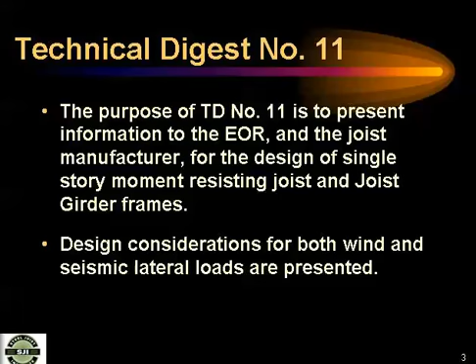It was just, you knew what the loads were. Now, when I look at these examples, half the time is spent figuring out ASCE 7 and figuring out what the load is. It's much different than where I'm from in Wisconsin, where it was a 20 PSF wind load, and take 3/4 on the roof. Most of my buildings have flown away by now, by the way, so it's a different world. But there's a lot of time spent, and it's not easy. It's complicated, so it takes time.

But that's the purpose. It's limited to single stories, not because of wind requirements, but primarily because of seismic requirements. If you look at trusses or roof joists or joist girders, in general, they are so much stiffer and stronger than the columns that you cannot do the weak beam, strong column criteria like the seismic codes would like us to do. You have strong beams and weak columns, and that is permitted with one-story buildings by the code. So that's why this is limited, at least at the present time, to single-story buildings. But that is the predominant use, as we know, of this material. I mean, most joists and joist girders are in single-story buildings.

However, I might mention that there's a brand new specification and catalog on composite steel joists, which is really aimed at the floor systems.

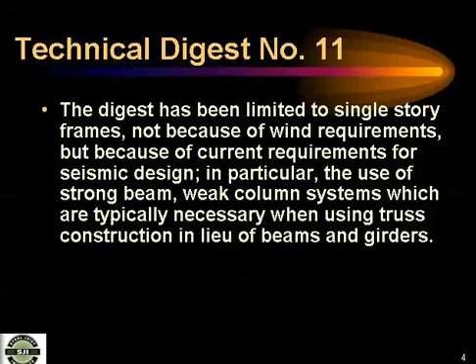The digest illustrates the procedures for how to analyze, design, and specify joist and joist girder moment frames to resist these wind and seismic loads.

We assume in the digest, and you know what that means, that you're all familiar with the 2005 AISC specification. That in itself is a major learning event for many of you. And that you're familiar with the 2005 AISC seismic provisions, and that you're familiar with ASCE 7-05. So once you get familiar with those, it's time to retire. And then there'll be new ones.

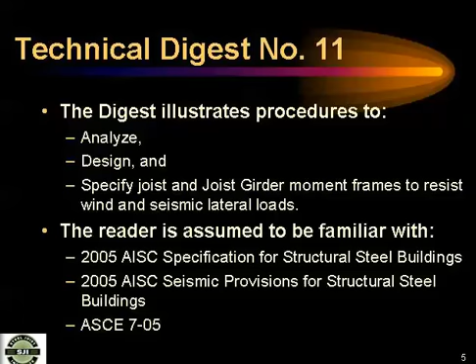One point I want to make: there's no more difficulty in designing a system with joist and joist girder frames than it is using wide flange beams and columns. I think the only added requirement that is very important is communication. There's more communication that needs to go on between the engineer of record and the joist supplier as to specification of items and exchange of information, and we'll talk about that.

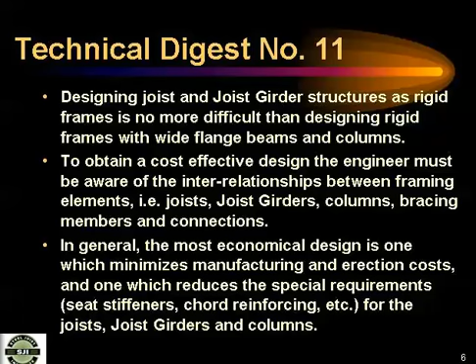You need to be aware of the interrelationships between the framing elements. As we all know, the most economical design is one which minimizes manufacturing and erection costs, and one that reduces special requirements like seat stiffeners, chord reinforcing, etc. Same as with normal steel frames. I want to make this point.

When you have a single-story building and you're looking at the lateral load system, the last system you want to really use is a moment frame. We're talking about moment frames, but it's the least cost-effective frame system. You really want to look to see if a roof diaphragm system with wall bracing can satisfy the lateral load requirements, because that is going to be your most optimum type of building.

And when can't you do that? Generally, it's only when you have long, narrow buildings, when the length to width ratios exceed, say, 4:1 roughly. Then your diaphragm systems get to be impossible to make work, or very difficult to make work. So keep that in mind as we go along here. I'm not pushing moment frames. I'm just saying if you have to do moment frames, then this is how you do them.

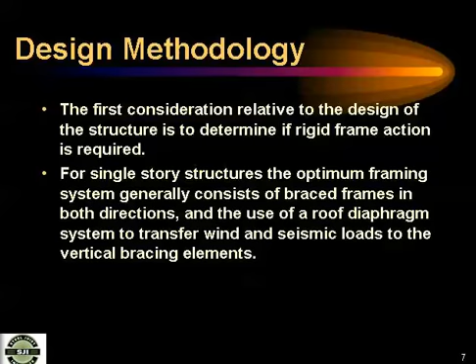As I said, we have to communicate with one another. That is, in your design offices, you have to communicate the design data to the joist manufacturer. You must specify the proper loading to the joist manufacturer, and the stiffness data, which is a little different than what you may be thinking about, because remember, you're doing a moment frame, and now the stiffness of the joist or joist girder comes into play as far as how the forces are distributed between columns and the joist girder or joist.

What's also very important, not only in this type of framing, but in any building, is the columns and the connections - that you're very clear on how you want the joists or joist girders to frame into the columns, and you need to do that design properly, of course. So you have to have proper communication.

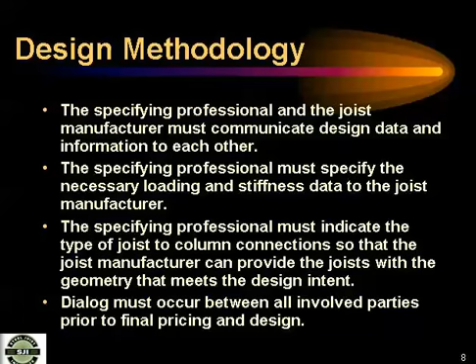The joist manufacturer, once you give him or her these loads, will design in conformance with the SJI specifications and other contract requirements specified by the design professional. And I think we'll talk about a few of those different requirements than what is normal within SJI in just a few minutes.

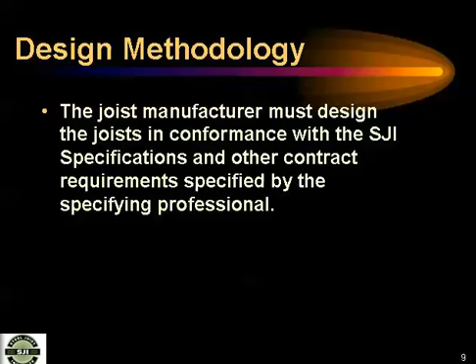Now, what you're designing here is considered an ordinary moment frame in seismic terms. We always just said moment frames, but when you start talking about seismic applications, then we would call this an ordinary moment frame. And the R value for the system is 3.5. And we'll mention whether you should be using 3.5 or whether you should be using an R of 3 in various designs.

And of course, the first step is to perform a preliminary analysis. In general, I would say for one-story buildings, it's good to consider the bases of the columns as pin bases, and then create all the moments, or take all the moments out, in the joists and joist girders. You may have to use some fixed base conditions to control drift in certain instances. I try to stay away from it myself, especially on the exterior columns, if they're on some sort of pier or something - you just get into problems with development of the moments at the pier locations. Interior footings, it's not so bad.

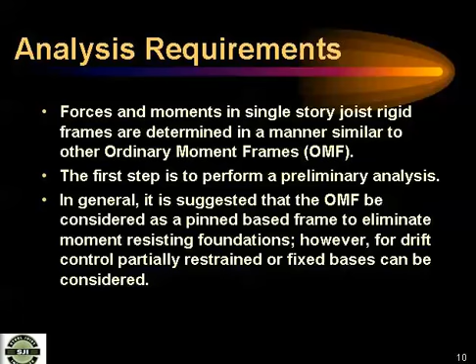Of course, after you do a preliminary selection of the columns and joists, you do your computer analysis or a hand analysis, if anybody's still doing that, to determine forces, moments, and deflections. Now, you notice there in parens, both first order and second order. I think you are all aware now that the AISC 2005 specification, which is adopted by the 2006 IBC, requires a second order analysis on all steel structures. So you must do a second order analysis.

Now, some people get all excited about that, but for most people today, it's you push that button that says second order analysis, right? Now, there's some things you're supposed to do, and that we have to do now because some of the software vendors haven't caught up with what the specification wants you to do. And that's explained not only in this technical digest, but AISC has done a good job of trying to educate people on this issue. And there will be a design guide coming out by AISC shortly on how to handle second order effects.

One thing that's a little different here is that as soon as you say you have to do a second order analysis, that's a nonlinear problem. So your analysis must be made for each required load combination. You can't do an analysis for dead load, live load, and wind load, and add those up. It has to be for the required load combination because it's nonlinear.

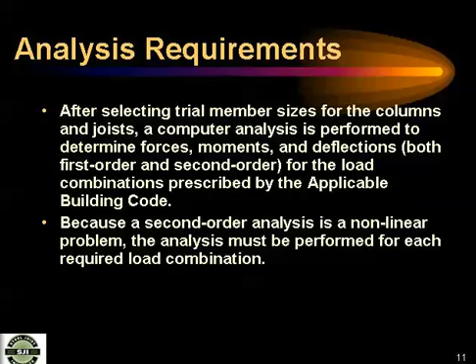Okay, now what we recommend in the technical digest are a couple of different models for analysis. The first is what we call Model 1, and it's to get the behavior of the frame both from a strength point of view and a stiffness point of view, that is, how much drift you have in this particular frame.

And for the most part, it's accurate enough to model the structure by going to mid-height of the joist or joist girder, assuming a prismatic member, and use an equivalent moment of inertia and area that represents the moment of inertia and area for the joist or joist girder in that frame. You'll notice that's represented by the dotted line there.

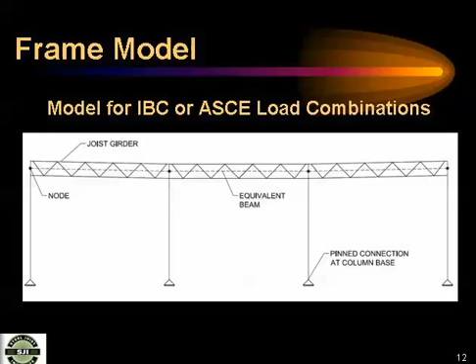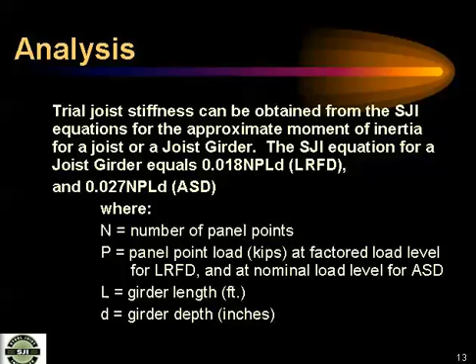Most of you may know this, but the trial joist stiffness can be obtained from the SJI equations in the catalog. There's two equations, one for LRFD design, one for ASD design, shown on this slide. If you have a joist girder, N is the number of panel points, P is the load at each panel point, L is the girder length, and D is the girder depth. You substitute in the equation, and you have a moment of inertia that gets adjusted by about 15% usually because of web distortions. There's also an equation in the catalog.

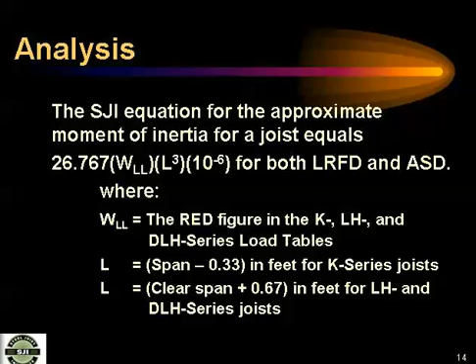If you have a joist, you can find from the load tables an equivalent moment of inertia. So it's not a big deal to get, for preliminary sizing, what the moment of inertia of the joist or joist girder is.

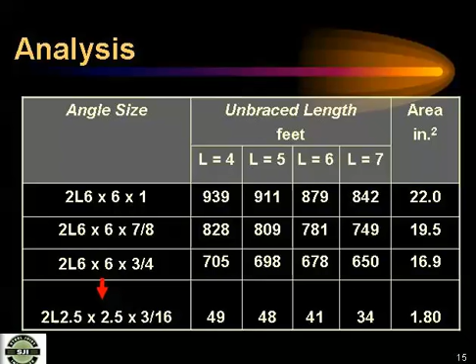So when you're looking at some of this material and you look at a moment, let's say you come up with a moment and you wonder what the size of those chords is going to be. This table is very valuable because if you find the force in the chord, that's moment divided by depth, the table goes all the way from 6 by 6 by 1 inch angles down to 2.5 by 2.5 by 3/16, and the values listed are the axial loads. This is an LRFD table, by the way. The axial loads that two angles can carry with the unbraced lengths shown, and then the area is given. So it gives you a way to get a quick look at what the angles are going to be, and then if you know the angle size, you can also calculate a moment of inertia. So that's helpful information.

The reason that's there, and the reason I put it in the catalog, is that the 2005 AISC manual does not contain tables for two angles in 50 KSI material. The 9th edition manual did contain that, but it was dropped from the 2005 edition. You only have A36 material for the angles. So I used to go to the 9th edition and look up those strengths, but since it's not there, I created these tables.

Now, there'd be other ways to do it. You could divide your LRFD moments by 1.5 and go into the ASD tables if you wanted, but this is more convenient. Yes sir? Where's that table located? This table — the question was, where is the table located? It is in the technical digest, okay. Or it would take you an hour on an Excel spreadsheet to develop such a table.

The second model — we've got one model that we look at for the drift and initial sizing. The second model is what we call Model 2, shown here. And as you know, in seismic design, you have to have some sort of fuse that's going to go. In this case, since we have weak columns, the requirement is that the column will develop its M sub P.

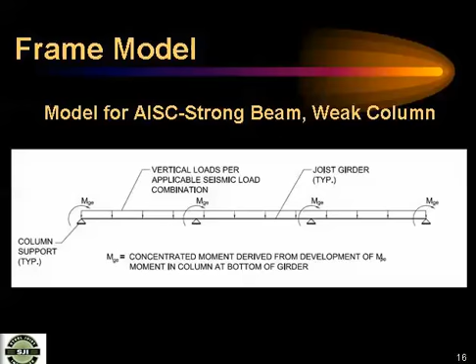This just shows what that particular moment diagram would look like. So you can see the center joist girder, the MP moment gets distributed left and right, and it's basically half MP, but the end spans get the whole moment thrown at them.

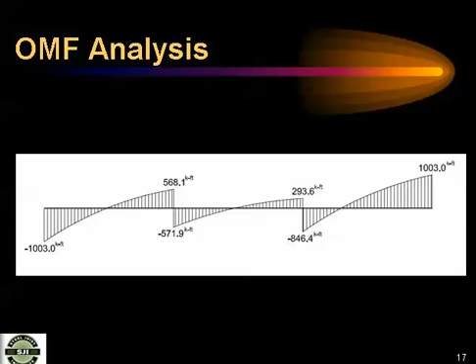Another thing I want to mention - some of the old timers in here, like me, have a lot of buildings designed where we never thought about what we call the leaning columns today, because we just didn't think about it. We should have, whether we were doing ASD or LRFD, it doesn't matter. We should have thought about it.

What that means is, and I think an easy way to explain it to those of you that haven't thought about it, is if you have a big box building - let's say we're not even talking moment frames, you have a tilt-up wall job, and you're figuring out the diaphragm forces into the walls. You basically have post and beam columns everywhere in the building.

We used to look just at what the lateral loads were and take those over through the diaphragm into the wall system. Many people did. But think about it - the columns are not straight. Every column needs a brace. The diaphragm's bracing the top of the column. Every brace has a brace force, and those forces can accumulate.

That's another way of looking at P-delta. As it sways and you have an axial load, it's trying to overturn, you need a resisting force. Now that can be a fairly sizable load if you have a big building, lots of leaning columns, and it sways a lot. So that is required in your analysis to consider these leaning columns.

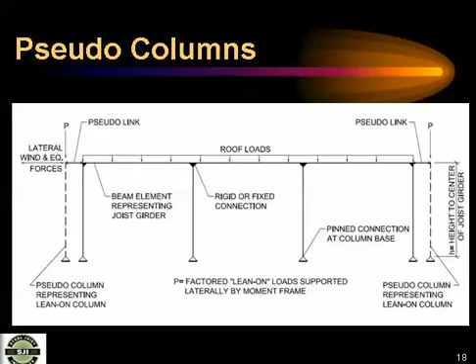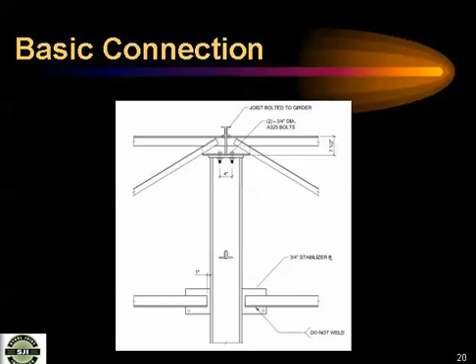That connection, of course, is not able to develop much moment capacity at all, so it's not recommended for these frames. You can do things in light of wind loads, for example, where you can stiffen things up to eliminate bending in the chords, and those connections are shown in the book.

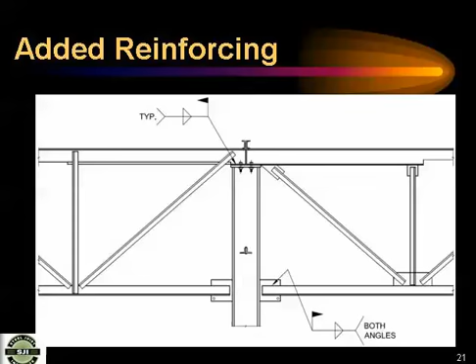One that I've used with success on wind frames, not seismic, but wind frames, is shown here. What I often do on these buildings is I'll use the perimeter columns as the moment frame columns and leave the interior columns as leaning columns. Put all the moments in the sidewall columns, for example, and the first joist girder that frames into them. Why do I do that? Because I've learned it from my friends in the metal building industry. That's how they design their frames, and they know what they're doing to get an economical frame.

So one connection, if your moments aren't too great, is to simply have a special seat here on the joist girder where you spread your bolts out so you have some moment capacity, and that works very effectively. You can think of it, if you have a little problem thinking of it as a moment connection, just think of it as an end plate. You've got two end plates: one on the top of the column, and one on the seat. If you give the manufacturer the forces here, they will design that seat to take those forces.

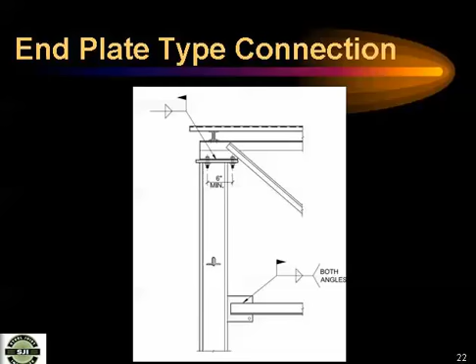So that's very effective if you use perimeter columns, and it's only good for a certain amount. I think roughly, if this force is roughly 50 kips in the chord, it's a good connection. If it gets more than that, it gets a little out of control.

In which case, we switch to what I would call my favorite connection, where you take the girder off the top of the column, put it on a seat, either stiffened or unstiffened, and then weld a plate to the cap plate of the column and weld the plate to the top chord of the joist or joist girder. The reason I like that is I'm not depending on the joist girder supplier for anything other than taking the moments. I don't have to have them do anything special. So this is very effective.

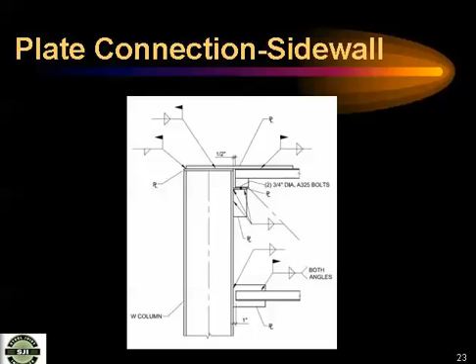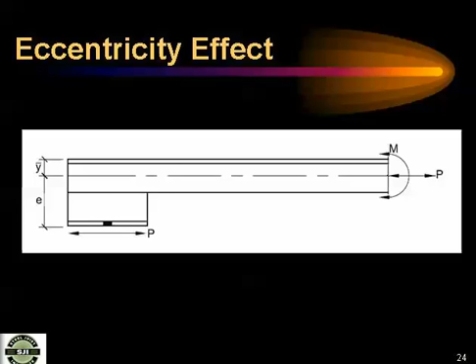Now this connection works well for seismic applications as well, and it's been tested at Georgia Tech by Professor Leon for all the cyclic and hysteresis loop kind of requirements, and it works well. The reason we get excited about this is because if you just have a force here, you have an eccentricity P times E, and that moment in the top chord of the joist or joist girder just can't be handled. The two angles are just not strong enough to handle much moment. So that's why you have to eliminate that eccentricity by some means.

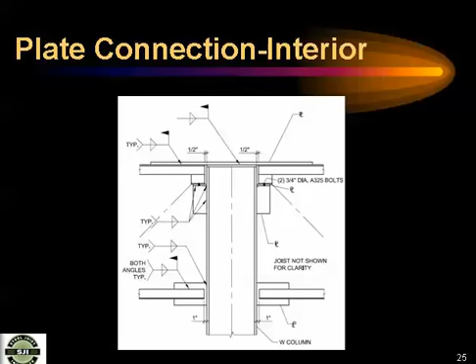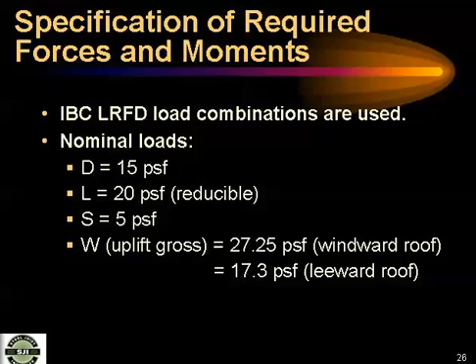Because remember, you've done this indeterminate frame analysis, and you need to specify what you want. Now, you might say, well, what if the joist girder manufacturer comes back and has a larger moment of inertia than the minimum? What's that going to do to you?

Really nothing, because the columns aren't going to get any more moment than M sub P, and nothing changes there. So I don't think it's too critical. The drift may get reduced because they've used a larger moment of inertia. But basically your analysis is going to be okay, and you don't have to redo it. Depends on to what extent your loads are on the slope part of the spectrum.

You end up with a stiffer building than you were assuming. From a seismic point of view, yeah, it could change the period of the building slightly, but probably not significantly. You could also give a range, and that's why a good preliminary design is good, and get the information to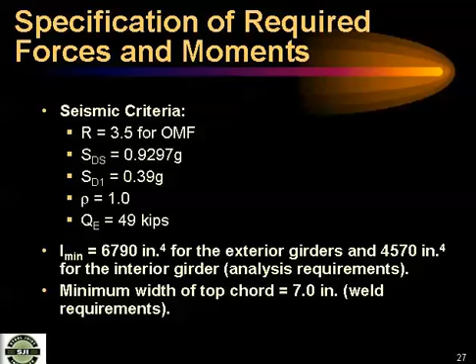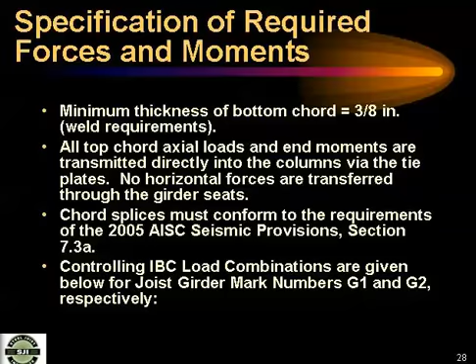Some other things we want to see specified, and these are all outlined in the technical digest, are the loads, and of course we give the splice requirements and the loading combinations. We've suggested a few tables in the document, various load combinations, and these may not be all inclusive, but they generally are the ones that control.

And as you all know, there's so darn many today that you can go crazy with load combinations. And I'm inclined to say the way we ought to look at structures today, you ought to look at 2 or 3 load combinations that you think are going to control based on your judgment.

Run those and see how your structure's behaving. See if it's strong enough. And then push the button for the 10,000 load combinations that the code requires, and then peruse that. Because otherwise, the tendency is if you get all these load combinations out of your computer output, it's so overwhelming that you don't look at any of them.

You just believe what's coming out, and that's not a good way to approach this.

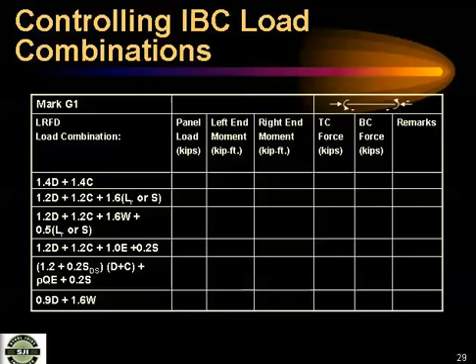So this is just an example: the panel load, the left end moment, right end moment, any top chord extra forces. Here's another suggestion, again this is in the digest. We also suggest a type of table you could use to show the various wind uplift criteria and forces on the joists and joist girders.

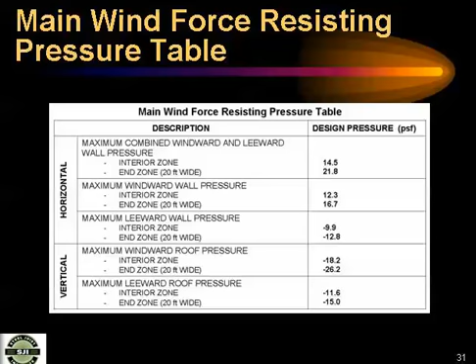Since we're an ordinary moment frame, I don't believe there's any locations of demand critical welds. There's no protected zones like in other systems.

And the one place where I failed to mention it -- the SJI has taken the position that they will design the girder moments, not just for the wind and seismic moment, but they'll design the whole girder for 1.1 RY MP. They want to guarantee that the girder stays elastic, so we put extra moment into it. I think that's important.

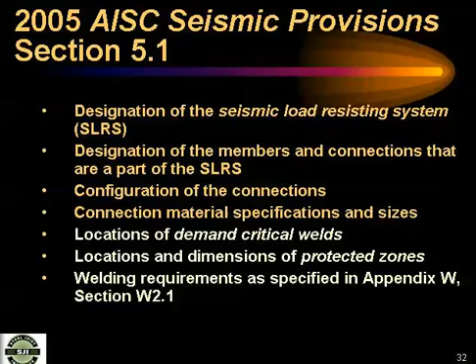The other thing is that any chord splices will meet the requirements of Appendix W -- or was it D1, what is it now? 8. Yeah, so those splices will meet those requirements. The web members will be designed in accordance with the SJI specifications.

Just a comment promoting the idea of using R equals 3 if it's a seismic application. You shouldn't use 3.5 and subject yourself to special inspections and special connection requirements if it's seismic design category B or C. We really recommend that you use an R of 3, just as AISC does for moment frames.

Yes sir, a question. If all the elements in a girder are slender elements -- 100 or something like that of slenderness -- they cannot arrive to yield in compression. It's absolutely impossible, so we cannot speak about inelastic behavior. So R must be 1 because we don't have inelastic behavior.

No, I think it's permitted in a single-story building, okay? We're guaranteeing that the girders will stay elastic. They will not go inelastic in the seismic event, so we can use R equal 3.5. The column will become the fuse, but we have to make sure that the girders stay elastic.

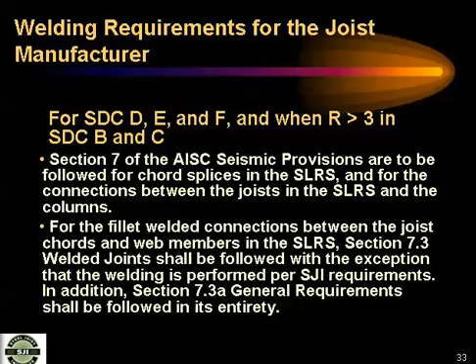In fact, I have one slide that shows it -- there it is. That's just what we think would be a good example to make sure you aren't doing something too flexible. But if you have a joist going to a joist girder, it's my view that the joist manufacturer has to design this bracing. He's the person that knows where the braces have to go, and he has to figure out the strength and stiffness required. Usually it's not a problem with the joist -- there's enough stiffness, so the forces aren't too bad.

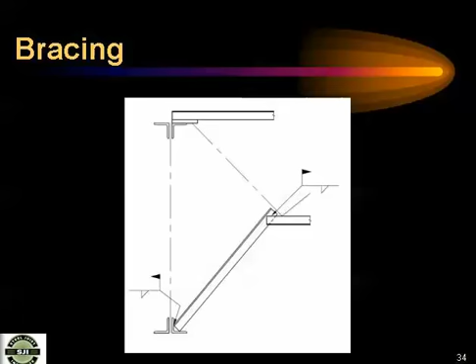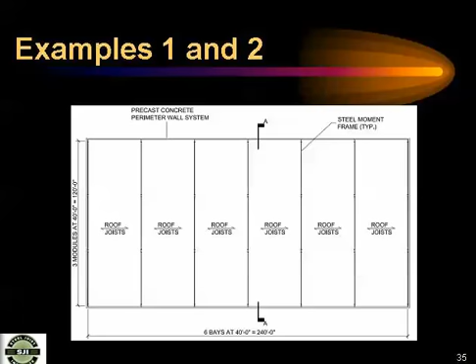In the digest, I do two examples. This is the building -- it's basically 240 feet long and 120 feet wide, sort of a box. It's got interior columns, notice it's the 3-span condition I showed before, and each line is a steel moment frame. And that is the cross-section of the building, with a 1/4 on 12 roof slope.

I never noticed this before, but the center girder says no slope. Can't have that.

As you all know, the IBC 2006 requires a minimum roof slope of 1/4 on 12. We got tapered insulation, or we got the camber. We would use the tapered insulation to get, let's say the drains were at the columns here. We would have to have a cricket.

Oh, thank you John, I'm saved. So that's the frame.

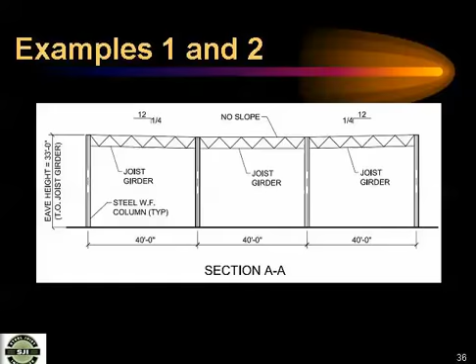Now example 1, I took as Charleston, South Carolina. Anybody here from Charleston, South Carolina? Bless you guys, you're in the worst part of the country, right? You got the bad seismic, you got the bad wind. What do you have, good-looking women, or what do you have there?

I don't know, but you guys are in trouble. And I took a building in Charleston, South Carolina that had precast concrete shear walls and non-load bearing. And here's the loads.

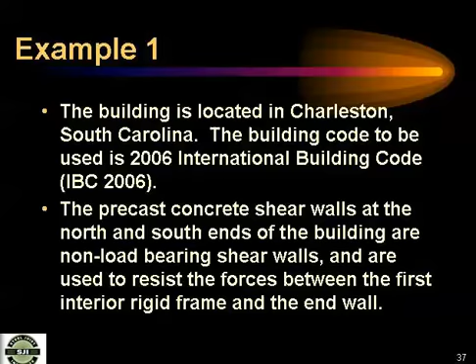Well, they don't have much snow there, that's one thing, so they don't have a lot of drifting. Here are the dead loads for the building, and there's some collateral load, sprinkler, some mechanical. Live load is 20 there, reducible to 12 for the main members. Ground snow there, that's a lot.

5 PSF. What did we have this winter? We had over 100 inches of snow in Milwaukee, Wisconsin. It's not over, is it? No. I remember twice in my life, May 5th, 6 inches of snow on the boat opening day of trout season. Yeah, you don't want to go.

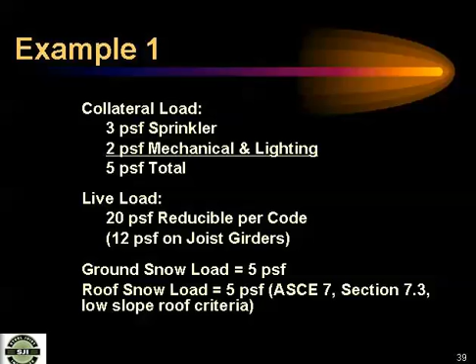So that's the snow load. Wind load, 120 miles per hour, Exposure C, it took. Seismic load is seismic design category D for the building that I selected. And I use a serviceability requirement with a maximum drift of H over 100 for the precast walls.

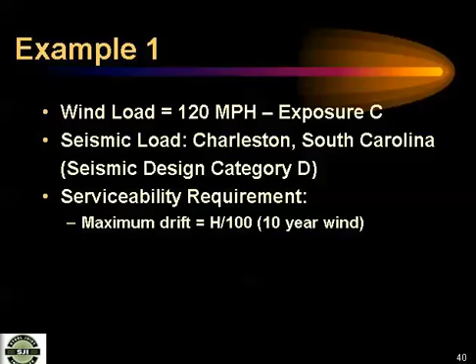Based on a 10-year wind. Example 2 was everything the same as gravity loads as example 1, I did that on purpose. It's a building in Mississippi, and it had the same wind loads, 120 miles per hour, Exposure C, but it's seismic design category B versus D. Same serviceability requirements. I thought this would be really interesting to compare the two.

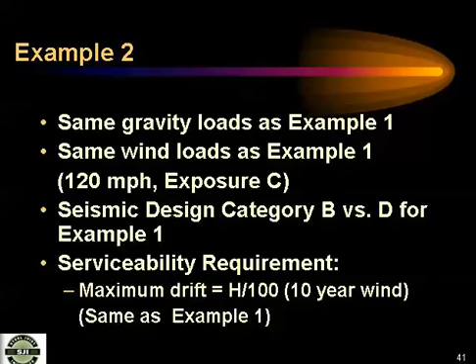The first one in Charleston, the wind base shear was 22.9 kips per frame line, that's with the 1.6 factor on it. The seismic base shear using R equal 3.5 was 49 kips per frame line. And example 2 in Jackson, Mississippi, wind base shear the same, and the seismic base shear, using an R of 3, since it's design category B, was 14.3 kips.

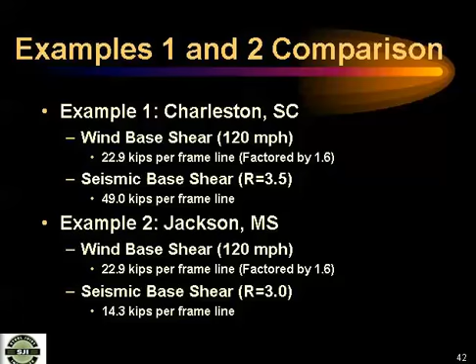And in the one in Charleston, South Carolina, I had to engage the interior columns in the moment frames as well. I couldn't make just the perimeter columns work and be decent, the seismic shear was just too big. So that was the center columns.

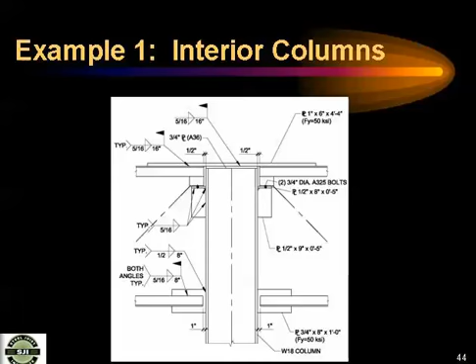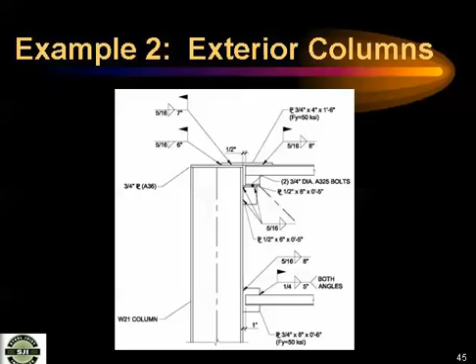And example 2, you'll see this when you go home and study all the materials you picked up at the conference, right after you submitted your CEUs. The second one had post and beam columns interior. For example 1, the one in Charleston, exterior columns were W18 by 86s, interior W18 by 97s. Total column weight 12,000 pounds, girder weight 6,300 pounds, about a total weight of 18,500 pounds per bay. Example 2 came down to about 12,000 pounds, so a fairly significant difference.

I think that if I lived in Mississippi, I'd be putting up posters that say, move here, build here, it's really cheap. So I'm kidding you guys from Charleston, of course. But there is a major difference.

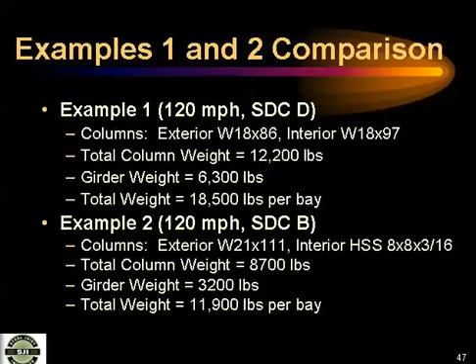There's an appendix that has a complete design for all this, how you got the wind loads. I went step by step through ASCE 7-05 and step by step a roadmap through the seismic criteria on what to do, how to go to the website and do everything that you have to do.